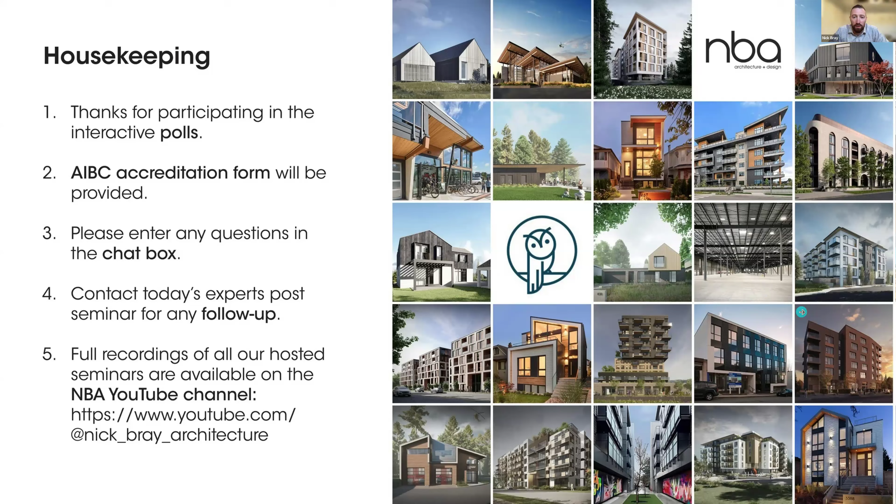We've got a lot to go through today, but briefly, we are consultants based in the Lower Mainland, but we work across Canada and even in the US with recent US clients on bridging the gap between the policies and what we know needs to happen for climate action, but making it actionable because we have boots on the ground. And we work from design to occupancy, support various types of projects for energy modeling, carbon modeling, research case studies, helping local governments as well engage on those topics and make them more digestible.

So today, we have a lot to go through, but I wanted to start with some key definitions on what is embodied carbon, life cycle assessment, some of the key terminology that we hear about. So we'll start with that and then move on to learning about some of the policies that are shaping the industry right now. And then we'll dive into some case studies, real projects that we have worked on, a few of them with Nick and the team. So we'll be able to give you some real insights into those projects.

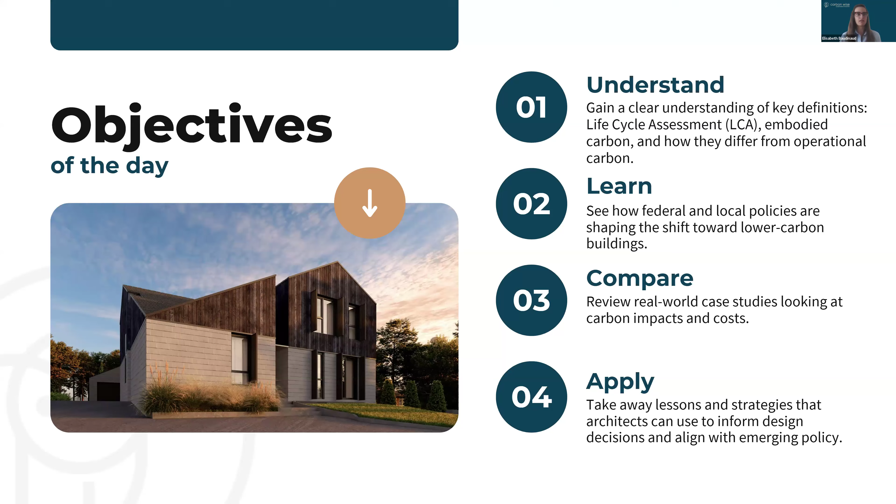And then we'll end with some recommendations and hopefully very actionable strategies that you can take away and start applying with your projects. So like I said, we'll start with definitions, then move on to policy, case studies, and lessons learned.

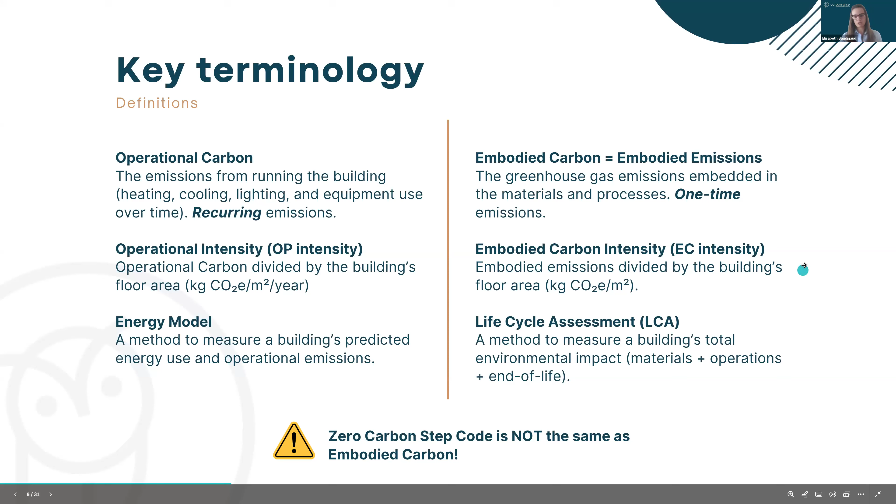And I put a note here about something I hear a lot: there is some confusion. The zero carbon step code is not the same as embodied carbon and does not regulate embodied carbon. The zero carbon step code deals with operational performance, but not embodied carbon. So I just wanted to get this out of the way before we move on into the focus of today, which is really embodied carbon.

So now that we've defined operational and embodied carbon, let's look at how they come together in practice through a life cycle assessment, or LCA. The LCA tracks the carbon impact of a building from raw material extraction all the way to its end of life. I like this infographic specifically because it is a loop, and I like to think that we need to close the loop and bring more circular practices into our industry. But it goes from, you see at the bottom left, material extraction A1, all the way down to C4 disposal.

So stage A on the left side is production and construction. This is where most embodied emissions come from. Stage B is the use stage, so that's where the operational carbon is also measured. It's one of those stages. And stage C, bottom right, is the end of life. So demolition, deconstruction, what happens after the building has reached its end of life, and what do we do with those materials afterwards? So the key for you as architects and designers is that the decisions that you make early around materials, assemblies, detailing have lasting carbon impacts across all of those stages. And that's why we use life cycle assessment, to quantify those trade-offs.

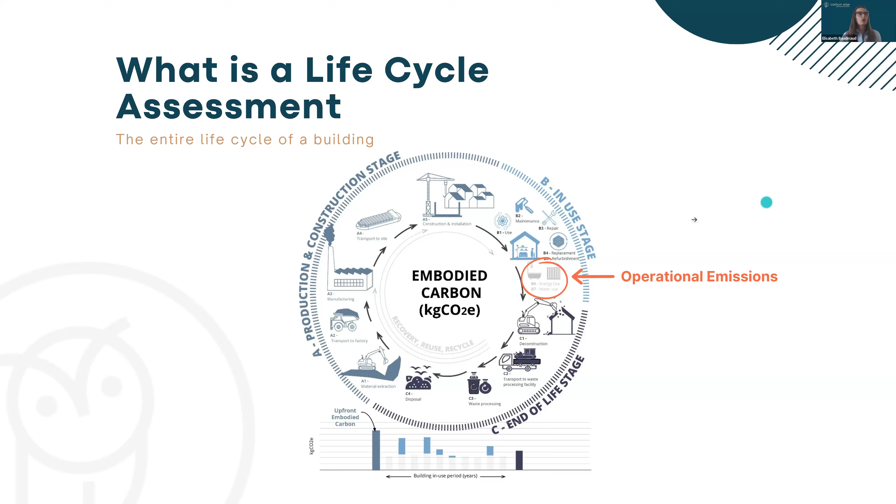A little bit more on key terms and some of the things that you might have heard already or will hear when we talk about life cycle assessment is to understand the boundaries of the study. So not every LCA covers the same stages. And that's where the terms cradle to gate versus cradle to grave come from.

So cradle to gate looks only at what it takes to make a product, from raw material extraction through processing and manufacturing and delivery to the factory gate. That's why the cradle to gate. And it stops before the product is actually installed in the building or used or replaced. And you can think about that as the upfront carbon price tag of the material itself.

And that's different from the cradle to grave, which takes it a little further and covers the entire life cycle of the product from extraction all the way to end of life, including construction, use, maintenance, and really what happens after demolition as well. So it's the full story from birth to death.

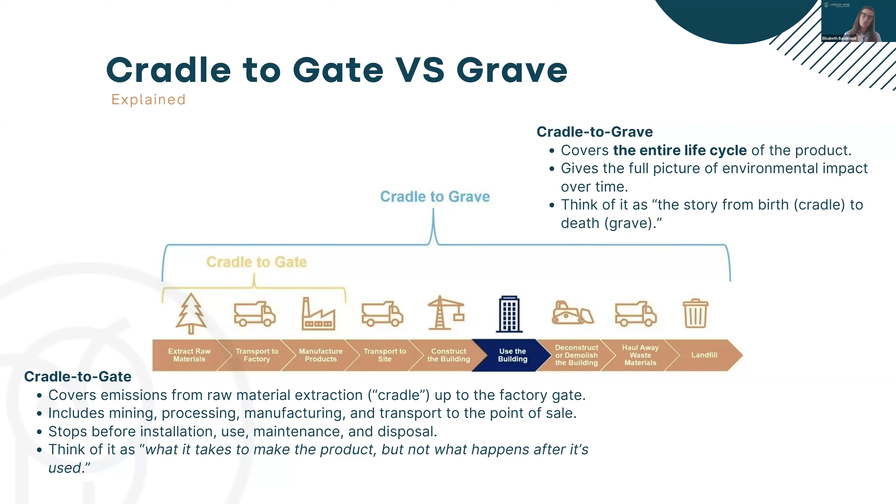And so for years, the focus has been on operational emissions, about how much energy a building uses once it's occupied and what type of energy source it's using. And that's all very important because those were the majority of the emissions that were coming from buildings before we started to get a handle on those. But the reality is that now operational emissions are going down.

In BC specifically, between the Energy Step Code, which regulates how much energy we are using, the Zero Carbon Step Code, which regulates which fossil fuels we are using for this energy, and the clean grid we have, the operational emissions from buildings have dropped significantly over the past few years. On the other hand, embodied emissions coming from the materials and processes are becoming a bigger share of the pie.

Why is because, first, we're building more infrastructure. For example, the Site C dam, that's one of those that is a massive embodied emissions output for electrifying our buildings. And then we also use a lot of high carbon materials like concrete and steel. And we also use heavier assemblies, thicker concrete, or sometimes redundant materials and finishes that increase the embodied carbon without always improving the performance.

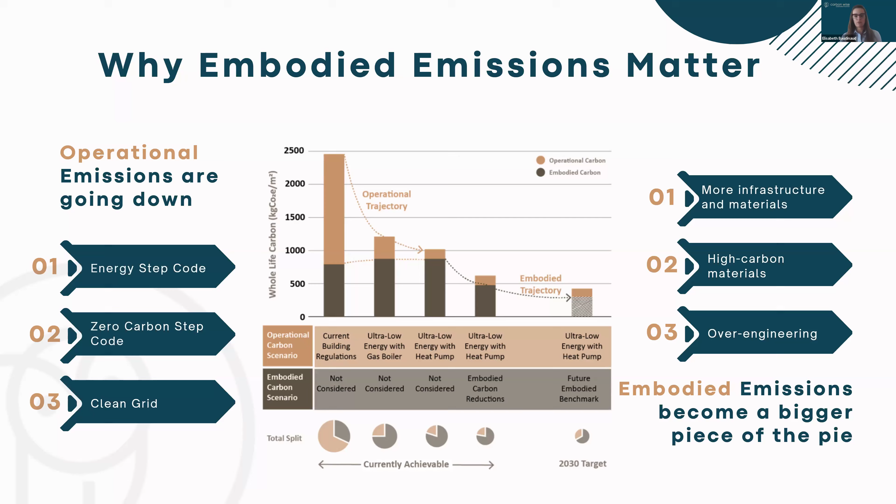So for your work, this means that the biggest carbon lever isn't just energy efficiency anymore. It's also the materials you choose and how you put them together. So again, some differences between embodied and operational emissions. On the left are the top 3 sources of operational emissions. And historically, these came from fossil fuel space heating, hot water, and cooking.

But with electrification, efficient systems, and the clean grid that we have in BC, those are essentially a solved problem for new construction. Codes and technology are pushing operational emissions down really fast. And on the right, we have embodied emissions. And usually the top three culprits are concrete, steel, and petroleum-based materials. And unlike operational emissions, embodied emissions are not addressed currently by the Step Code or any energy performance rules.

So here is the shift. Operational emissions are on the way down, but embodied emissions are rising as the biggest challenge. And that's where architects have the most influence through design and material choices. And this is also why policy is starting to catch up. So just like energy codes and how they reshaped how we were thinking about operational performance, new rules are emerging to guide how we deal with embodied emissions.

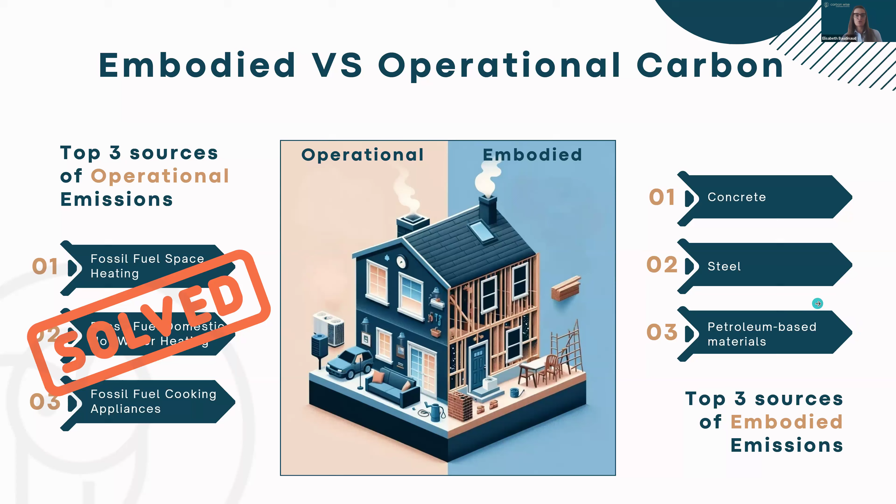Which leads us to the next section on policy. So I'll start broader at the federal level, and then we'll narrow it down to what's happening locally in BC. So at the federal level, Canada has started to put real requirements in place for embodied carbon. And these are beginning with some federal procurement and construction projects.

So the Standard on Embodied Carbon in Construction, for example, since 2022, has required new buildings to consider embodied carbon. And as of September 1st this year, projects must demonstrate 30% reduction compared to a baseline. So that's a significant target. And it forces teams to rethink materials and design choices. And it applies to projects valued at $10 million or more, and those ones that use a lot of concrete. And so that started back in 2022.

And in addition to that, since 2023, there's the standard on disclosure of GHGs, so that's also large federal procurements that require suppliers to be transparent about their greenhouse gas emissions and to set reduction targets. So in plain terms, if you want to bid on a project worth more than 25 million, you have to show your carbon footprint and commit to reducing it.

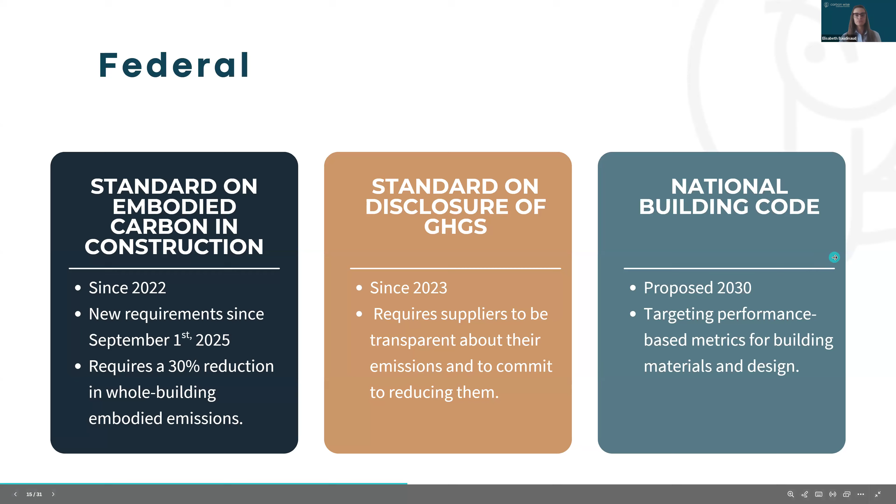And the key takeaway here is that, and we can speak about the City of Vancouver specifically, but it's not just Vancouver anymore. So from UBC to Richmond, Squamish, Nelson, Victoria, embodied carbon is showing up in either bylaws, rezoning requirements, and climate plans. And again, always disclosure and reporting first, and then reduction requirements will follow. So it's very similar to what we saw with operational energy.

A quick note on the City of Vancouver. Because of having their own building bylaw, the City of Vancouver has set some targets, so reporting targets and then not exceeding a very broad target for now, and then a 10% reduction coming up, not yet implemented, but there is a requirement to have an LCA done at rezoning and building permit. And I'm sure a lot of you have already gone through that process. And more requirements will follow later.

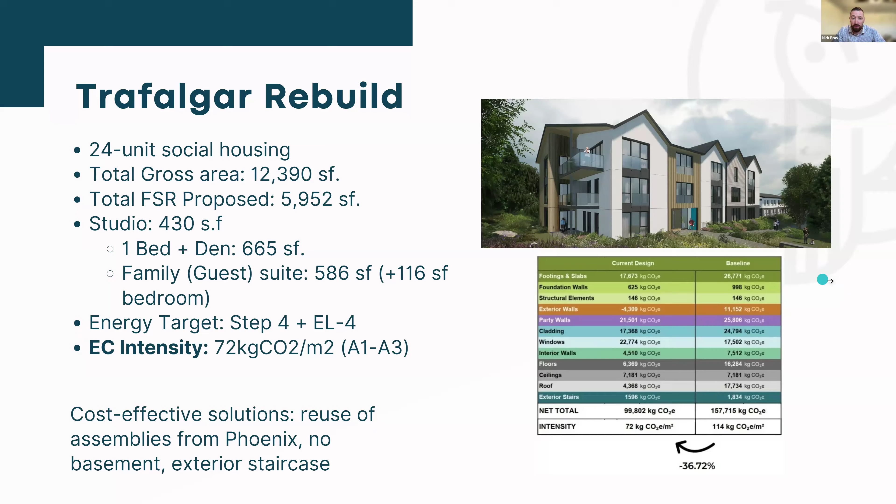Thank you, Nick. And then to give you a bit of a variety of projects, we also worked on a City of Vancouver tower, as part of a rezoning process and building permit. There are more details in an actual case study that was published by the Carbon Leadership Forum if you want to look at the details of that.

But really here we wanted to showcase some cost-effective strategies to reduce embodied carbon. So we hired a cost consultant as well, an estimator, to go through some of those changes. And we were able to achieve 334 kilograms of CO2 per square meter, which is really a 12% reduction from a baseline. We were interested in researching how we can meet the future City of Vancouver code, which will be requiring 10% reduction in these projects, and achieve 12% reduction with some cost savings.

Some of the strategies were reduction of parking levels from 3 to 1.5 underground, and replacing the curtain wall system with a steel stud wall. So that was an interesting thing to go through, which is very linked to what we're going to talk about next, a systems approach.

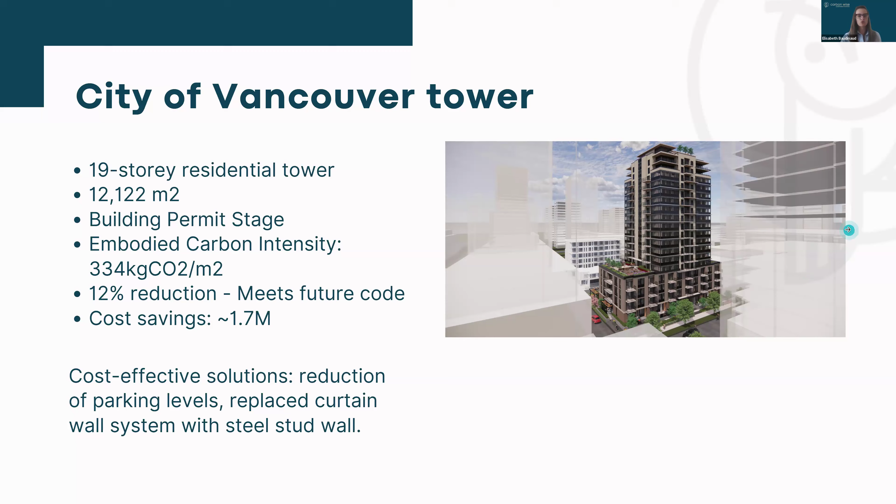I'll dive a little bit deeper into this fire hall case study that we worked on, comparing two designs. The complexity of always doing a baseline and comparing your actual building to a baseline building is that often, and that's been the case with the projects with Nick, by design the building is already low embodied carbon, because they have already implemented those strategies. So how do we show what would have been otherwise, right?

This project, the fire hall, was a great example where we were given two designs. We were given what they called mass timber, which ended up being a hybrid design with concrete, steel, light timber, and a CLT floor, and a concrete tilt-up design. Originally the intent was to go for the timber design, and then through engagement with the community and some pushback from the local community, they decided to go for the concrete.

It was interesting because costs of course came up as one of those issues, but then we were looking at what that really means. And that's after the building has been built. So we were able to look at and try to understand where the cost savings came from or not, and what that meant.

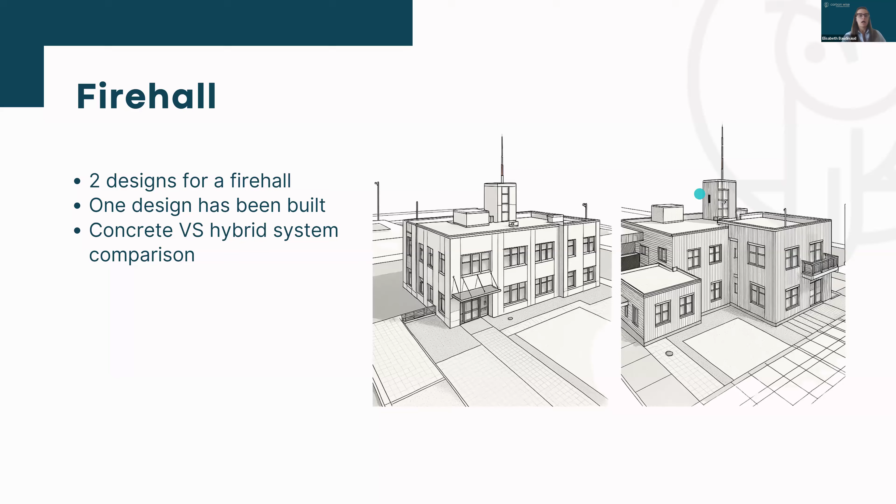So not only did the designs have differences, but also we looked at different stages of the LCA and whether or not we include biogenic carbon, which is a topic for a whole other hour that we don't have today, but there are lots of experts on the call that can answer questions around that. What I want you to take away is that depending on the boundary of the study, the results can look very different.

So A to C includes production through end of life, and A to D adds any potential benefits from recycling and reuse. And when you start adding biogenic carbon storage into the mix, the numbers change even more. And so I just want to say that it matters when we look at LCAs and when we compare projects. Our goal is always to make sure that we are comparing apples to apples, not apples to oranges. But that's especially important when we are comparing one design option to another.

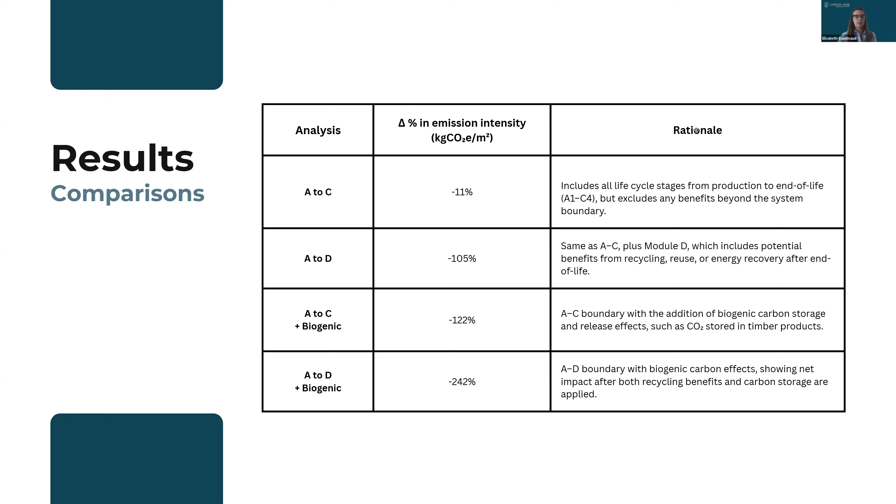But the interpretations depend heavily on the methodology. Life cycle assessment is a powerful tool, but it's also very sensitive and needs to be applied to each project for the goal of the project and what we are trying to get. So out of this comparison, some things really stood out for us: there were some key design and delivery differences between the two buildings.

Having structural plans for both, we were able to really list what that was. So first, the design maturity. The concrete building ended up being built, but the timber not. So the timber plans were still early stage, and the concrete design had already gone through some cost cutting and refinement. So that affected obviously both emissions and price.

The concrete design was integrated and efficient. Tilt-up panels combined structure, envelope, insulation, finish in one system. So that was reducing trades and simplifying construction and therefore reducing costs there. The timber design was a bit more fragmented. It relied on multiple trades on site, from framing to cladding, insulation, fire barriers. And there were unique wood-steel connections that also added complexity. And coordination gaps also added costs.

So more trades on site mean maybe higher costs, more complicated schedules, and also more risks for the timber option in this case. I really want to stress that this was not a mass timber design, even though when we were approached, we were asked to compare a mass timber design versus a concrete design. It happened that it was more of a hybrid system, which is where we don't see those efficiencies, right? So it's important to make the distinction there.

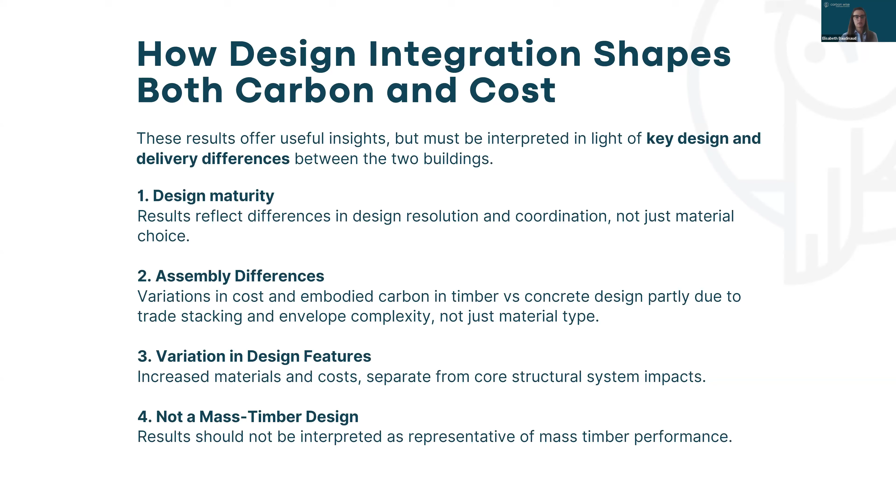So a lot of lessons learned from this project and all of the other LCAs that we have done so far. And I want to move on to the key takeaways and things that you can take on and use for your next projects. When we compare designs, it's very tempting to look for a simple answer, like timber is always better or concrete is always worse. But really what we found is more nuanced than that.

So number one, circularity matters. Think about that loop again. The ability to look at taking buildings apart and reusing materials can completely change the carbon story. So a material that looks bad at first can actually look much better if it's designed for reuse or lasts longer. And that's the case for the roof on the Phoenix house, for example.

In this case, it had a lot of recycled content in it, but when we looked at a steel roof versus the asphalt roof, a conversation we've had multiple times, on upfront carbon the steel roof looks much higher than the asphalt. So if you only look at this and you only look at carbon, you'll be thinking, well, let's just go with the asphalt. But the asphalt needs to be replaced more times. So at the end of the day, is it better or worse? All of those things are things that we consider when we do the LCA.

And biogenic carbon, of course, is another good example. Timber and mass timber store carbon, but that storage only matters if we protect it over the long term. So if a building is demolished and the wood is burned, then that advantage may disappear, right? So it's important, again, to think about the loop.

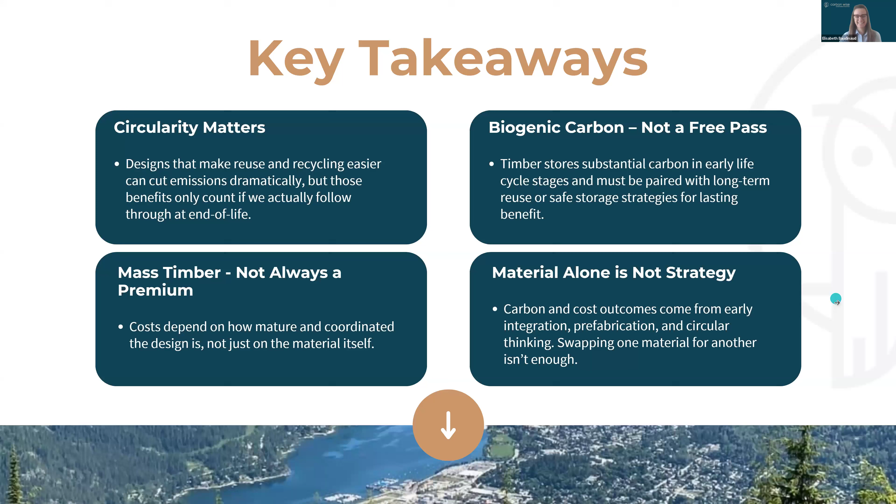I don't know how much trouble I'm going to get into with the diehards by saying that, but balance is the key. There is no silver bullet. Which is a good segue into the last few slides here on recommendations.

So apologies, it's a lot of writing on the slides, but we really want to stress that we need to design for system integration more than the material swap. That means starting early and coordinating with different consultants, aligning structure, envelope, and mechanical systems from the beginning to avoid redesign and added costs, and also keep assemblies simple. Fewer layers reduces trades and site labor, lowers risks, and lowers embodied carbon. So usually we find it's a win-win-win.

If doing prefab, which I think from a lot of points is a great strategy, then engaging suppliers and trades upfront is really critical. We've heard this from Kalesnikoff on this project with the Nelson study. They weren't part of that project, but they showed us how if they are integrated early, then the scheduling is so optimized that it makes a lot of sense. And we are working with them on another single family home where they have concerns about the roof line, for example.

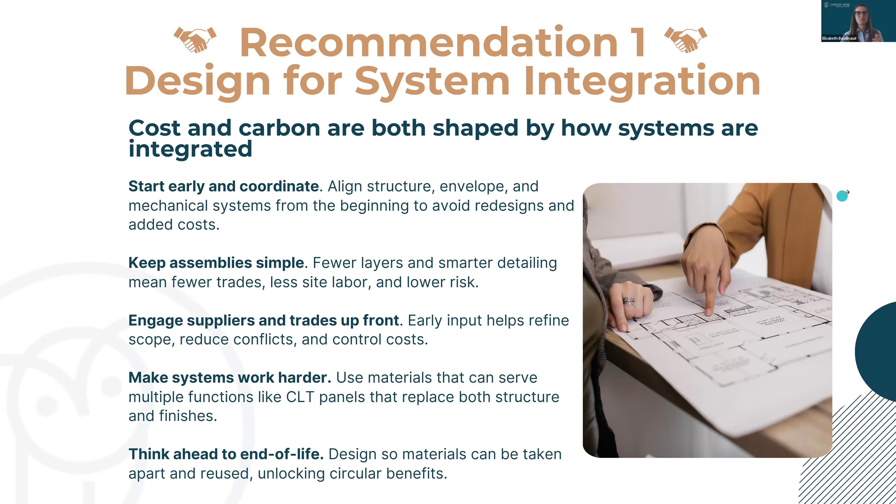Recommendation number 2, leverage prefabrication. It simplifies construction, shortens timelines, and amplifies the carbon savings. It's a very efficient process if it is combining systems, planned early, and working locally. With what's happening south of the border now, we are thinking a lot more about this, but we have the resources in Canada, we have the suppliers, and we have companies that can provide this much needed housing. So it's about how we can engage local suppliers and partners early and make projects stronger from the get-go.

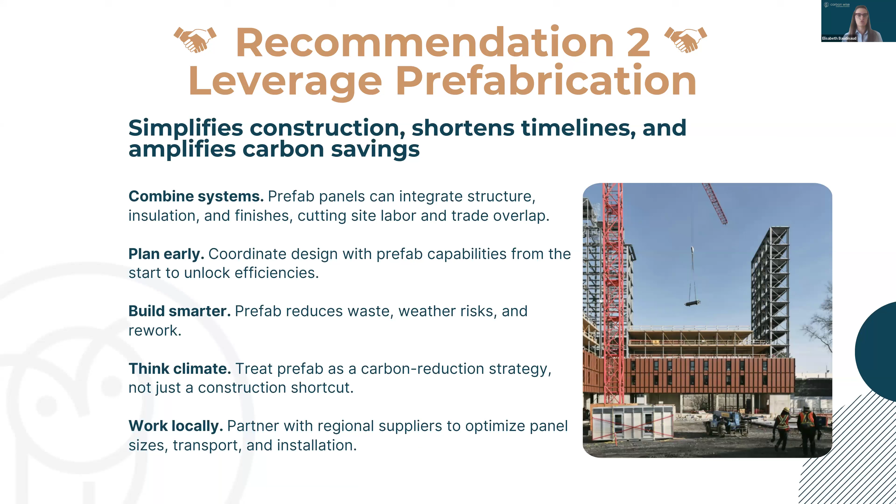And there are a few projects in BC that are success stories showing a lot of cost savings related to full mass timber designs when they are done properly. So I'll end with that, and just say that the polls we have posted, and there's the next one up here, are really helping us shape what potential embodied carbon policy could look like. So thank you for taking the time to fill those out.